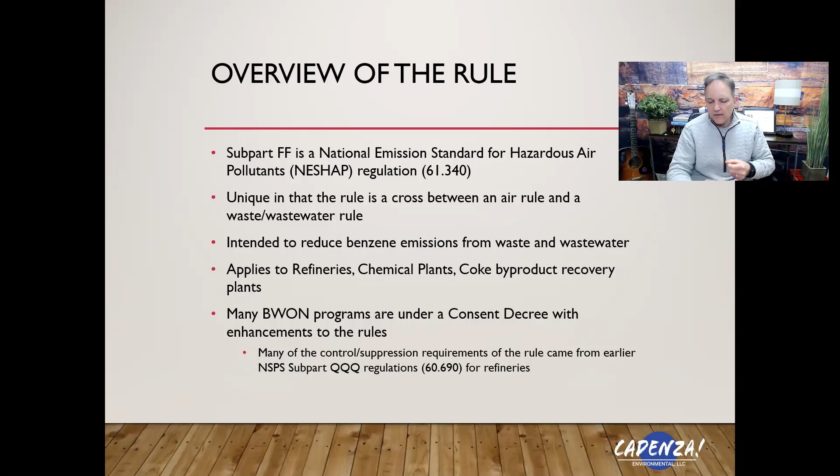So what it means, overview of the rules, the total annual benzene, that's the amount of benzene that's associated with waste at the facility. It's called the TAB, which is an acronym for total annual benzene. You must calculate that. I'll get into that in a moment.

And the other basic part of the rule is whether or not the waste and the waste streams, individual waste streams, are either controlled or uncontrolled. And those terms are not defined, but basically the terms generally refer to whether or not a waste stream is enclosed as to prevent emissions from escaping to the atmosphere.

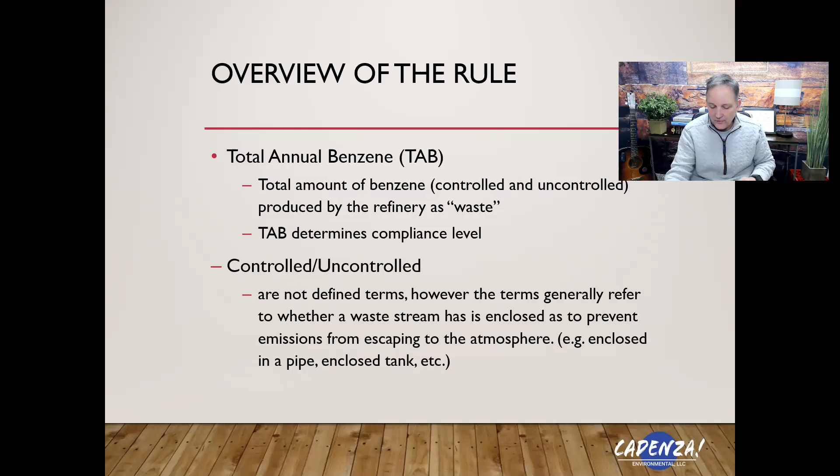So if it's in a pipe and it's enclosed and there's no way for emissions to come off of that, that would be considered controlled, or a tank or any other particular type of unit, versus an open trough or a tank with an open top, or vented to the atmosphere. Those would be examples of uncontrolled facilities.

So in general, the rule requires you to calculate what your total annual benzene is associated with the waste. And if your TAB is less than 1 megagram, that's 1,000 kilograms per year, you are essentially required to submit an initial report identifying all of these different waste streams, and then sending in a report saying, hey, we're below any action threshold here, so you don't have to really do anything else.

If you have a total annual benzene between 1 and 10, then you also have to send in this initial tab identifying the waste streams and how much benzene you have associated with all these waste streams. But then you also have to submit that on an annual basis to certify that you are still below 10. And then basically you don't have to do anything else.

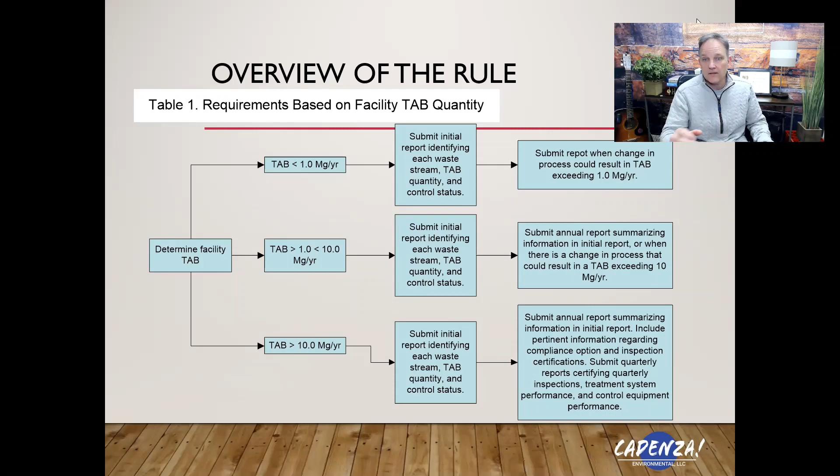But if you are above 10, which is the last category, you must submit this initial report. And many of these things were done back in 1993 when the rule was promulgated. But essentially, that is a requirement to submit this and then put controls into place to ensure that these waste streams are not allowed, in general, to emit emissions to the atmosphere. And I'll go into much more detail about how that is, and that's most of the rest of this presentation.

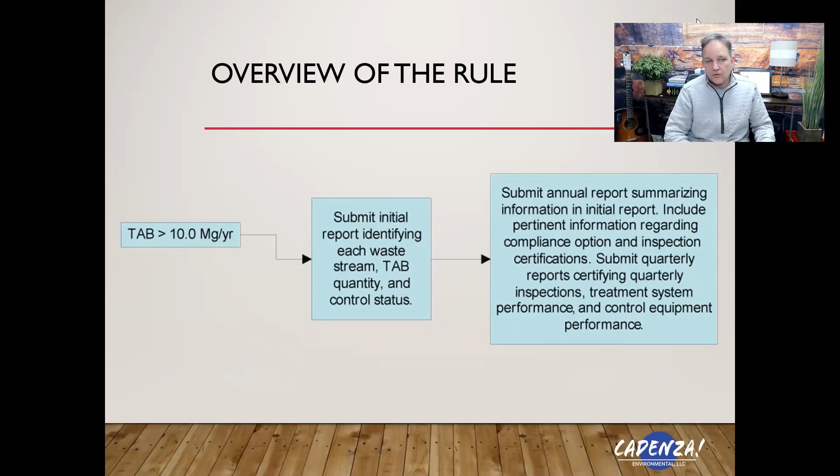So if it's a tab greater than 10, as I had mentioned here, you have to basically comply with all the control requirements, and you have to do inspections and reports and all kinds of things to comply. And not all, but most of a major good-sized refineries are required to do this. Many chemical plants are also required to comply with this part of the regulation.

If you are required to comply with 10 megagrams or larger, there are two major ways to comply. One is called the 2 megagram per year exemption. The other is treat to target, which is a 6 megagram option, sometimes known as 6BQ. I'll get into the details of the differences later in this presentation, but know there are two ways to comply.

Now I'll tell you what a waste is. It's defined in the rule, and it's different than what many of us are familiar with as the RCRA waste definition. In this case, waste is any material that is discarded or is being accumulated, stored, or physically, chemically, or biologically treated prior to being discarded, recycled, or discharged. So even if material is going to be recycled back into the facility or process, in many cases it still needs to comply with the control standards identified in the rule. Just know there's a big difference.

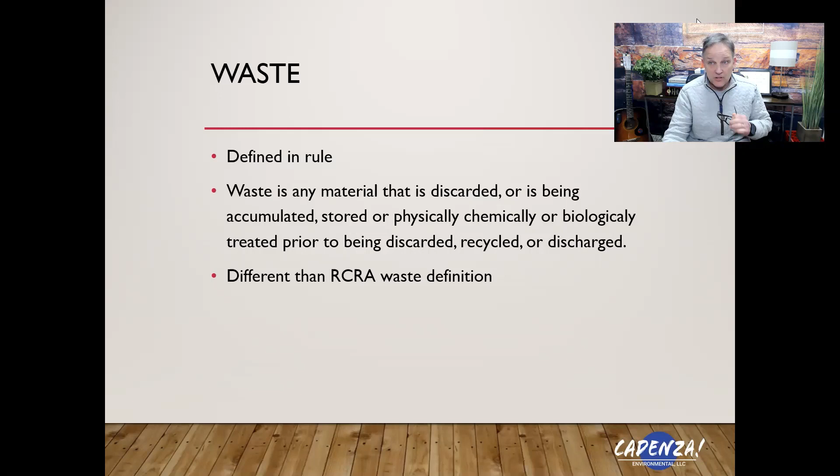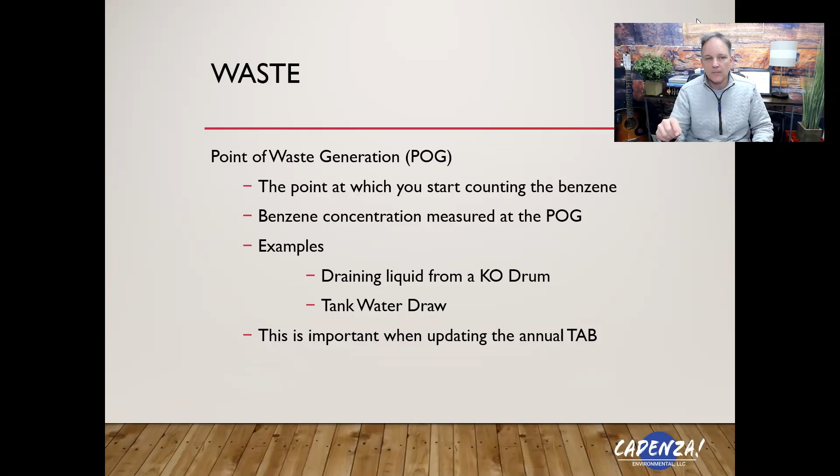The other part is the point of waste generation—identifying at your facility where the actual point is in the process where the waste is generated. It's called the point of waste generation, or POG or POWG. You may hear people talk about that, but it's exactly where it happens.

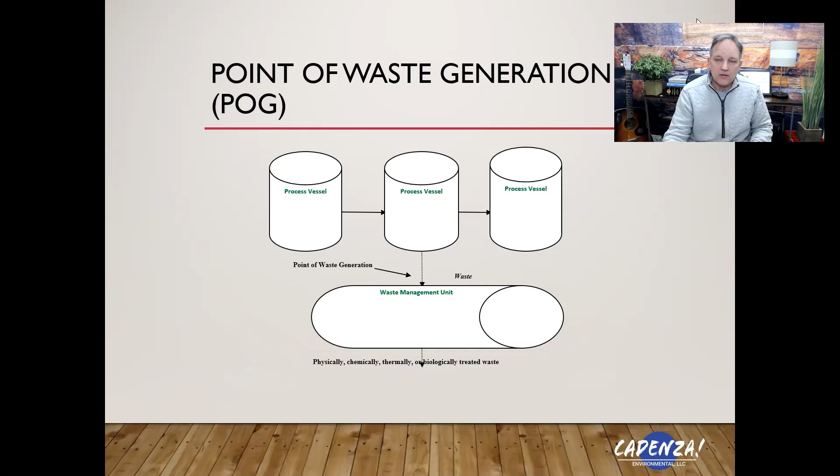For example, you may have a process vessel going to another process vessel, and in the middle of that you may have a water draw or other waste materials coming off. At that point it becomes the waste, meaning it's being treated and managed physically, chemically, or thermally in some unit prior to being completely treated, or that material going back into the process somewhere else. At that point onward, with a few exceptions I'll get into, it's required to be controlled, not allowing the emissions to go to the atmosphere.

So the difference between the TAB and the benzene quantity—I'll go back to this. The TAB is a list of all the controlled or uncontrolled waste streams, basically a list of all the different waste streams at a large facility, and that can be hundreds of places where wastes are generated. The benzene quantity is then used to track which compliance option we're using, either the 2 or the 6 megagram.

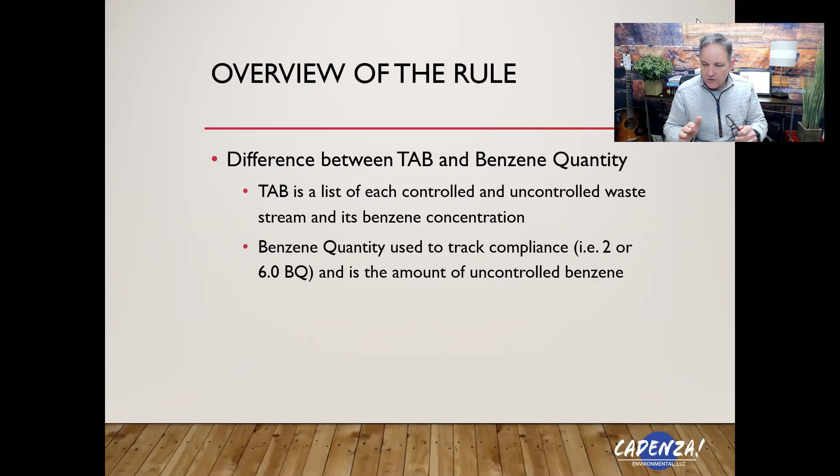I'll get into that in a moment. But I just want to make sure you understand there's a difference between the total annual benzene and what you have to track for compliance for the different options.

Under the 2 megagram option, EPA determined that if the benzene concentration in a wastewater stream is less than 10 parts per million by weight, you can exempt that from having controls to keep air emissions from going to the atmosphere. But if you have waste streams above 10 parts per million, those have to be controlled, meaning managed so they are not allowed to emit to the atmosphere—except you can have up to 2 megagrams allowed to go uncontrolled under that bucket.

So in many cases, that can be quite advantageous for lots of very low benzene concentration waste streams to be collected and managed in a non-controlled manner, as long as the ones higher in benzene concentration—above 10—are controlled, except for a quantity that would add up to 2 megagrams.

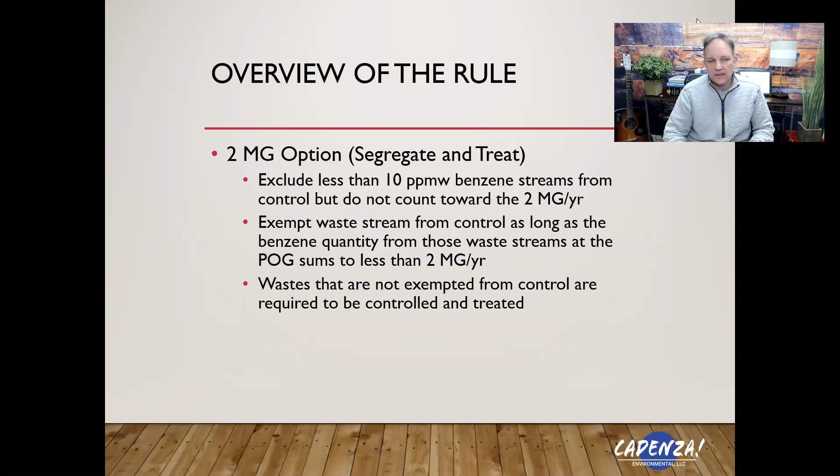However, the different option is the 6 megagram, treat to target, which means all the uncontrolled benzene waste—all of the waste streams—have to be controlled, no matter the concentration, except for up to 6 megagrams. So think of it as one column: it all needs to be controlled, except you can have up to 6 megagrams that go uncontrolled, and there are no streams—say, low in benzene concentration—that could go uncontrolled otherwise. You just have to account for everything.

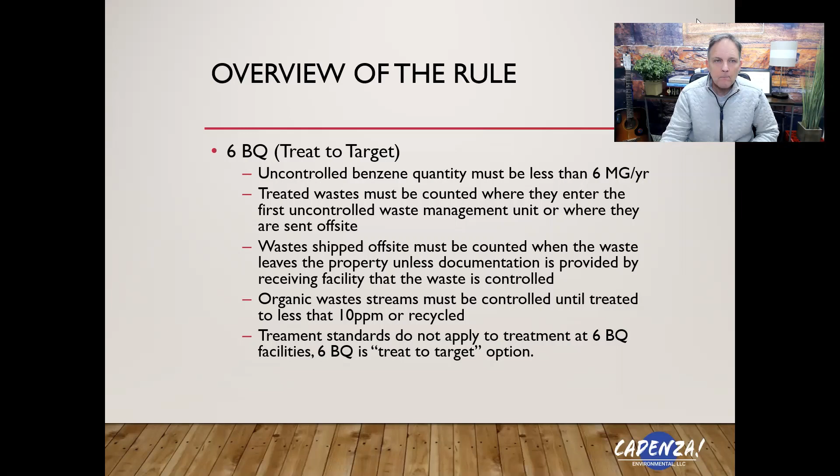So this is just another way to describe what I had just described, in terms of what has to be controlled or uncontrolled under these two differing options.

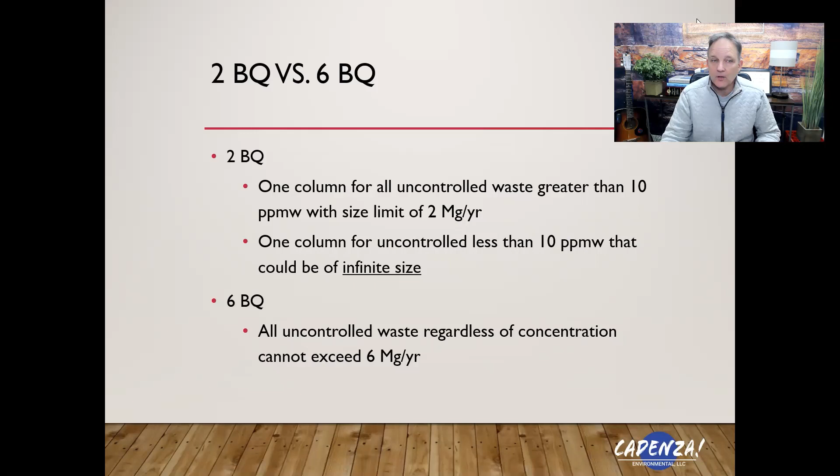So again, controlled means the waste must be managed in a controlled waste management unit from the point of waste generation to either when it's treated or recycled back to process. The control requirements for each type of waste management unit are specified in the regulations. The controls generally include seals and closed vent systems, essentially ensuring that any emissions off of the waste management units are either treated or adsorbed, but nothing is purposefully or accidentally allowed to the atmosphere.

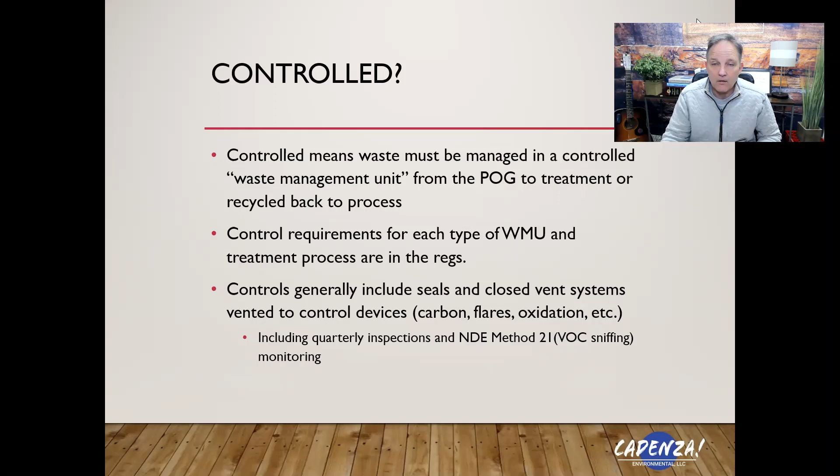This also includes periodic inspection to ensure, through what's called Method 21 - no detectable emission monitoring, otherwise known as VOC sniffing - that this is working. That's required for all of the differing waste management units managing the waste. So periodic inspections are required for all the waste management units. And here's some examples of the different types of waste management units.

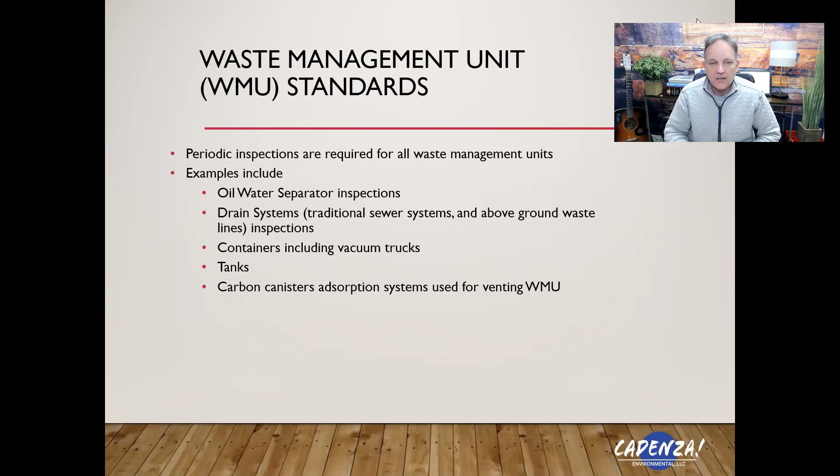There's oil water separators, drain systems - that's traditional sewer systems and or above ground waste piping - containers, including vac trucks and barrels and other kinds of things, tanks that are managing and holding waste, and even carbon adsorption systems used for venting some of the waste management units. All of these things require inspections.

So tanks, for example, that store liquid considered to be a BWON waste require fixed roof covers. They must be equipped with closed vent systems. Any emissions that come off have to either go to a flare or carbon canister or some other unit that destroys or otherwise ensures benzene is not allowed to the atmosphere. There are also alternative standards for tanks - sealing it up, floating roof tanks, other ways - that's specified in the regs, and it actually points to another reg called NSPS, and has to be managed under some other tank rules.

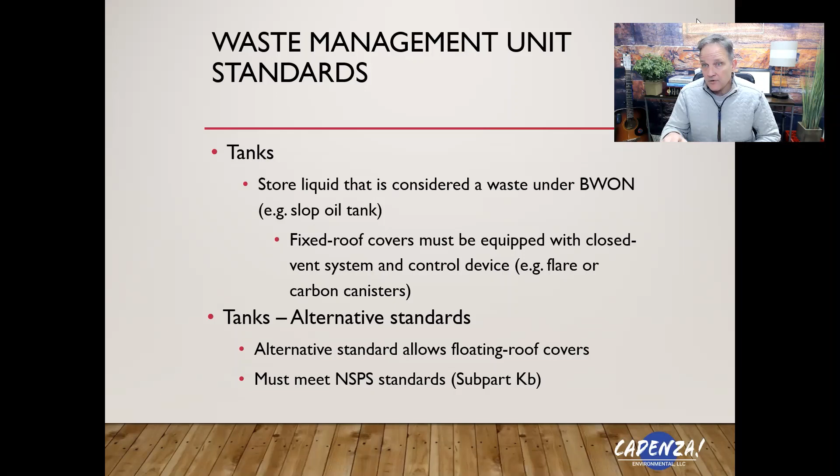Okay, so as I was saying, the vac trucks all must be equipped with covers that operate with NDE, that VOC sniffing, defined in the rules as anything that has to be less than 500 parts per million using Method 21. Openings must be maintained in a closed and sealed position. These can't be left open. They are allowed to be open for waste loading, removal, inspection, and sampling, and some things like that, but otherwise they must always be closed.

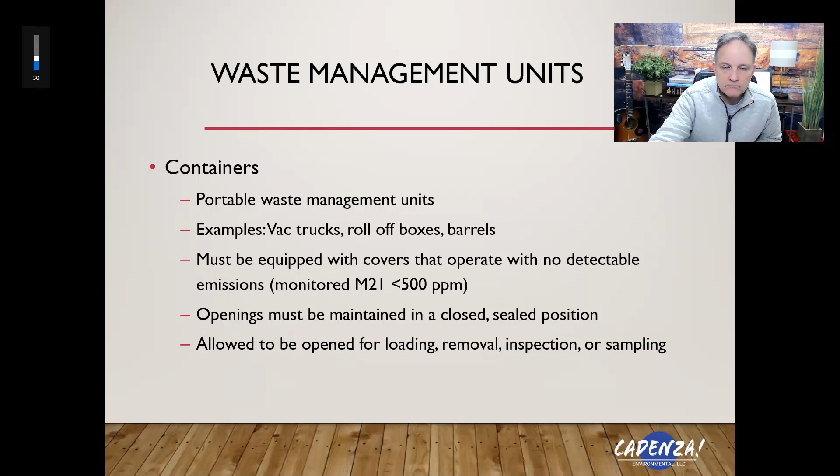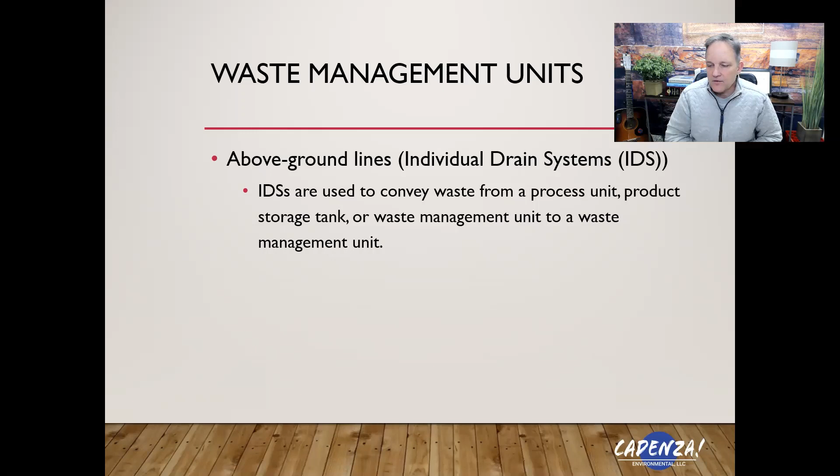So waste management units, also above ground lines, individual drain systems, as specified in the rule, are used to convey waste streams from the process unit. These also have standards that must be met. Individual drain systems include process drains, junction boxes, above ground sewer lines, ancillary equipment. They must be enclosed and vented in order to work - vented either to carbon canisters or flares or some other way to manage the emissions that would otherwise go to the atmosphere, just for a sewer system to be able to work.

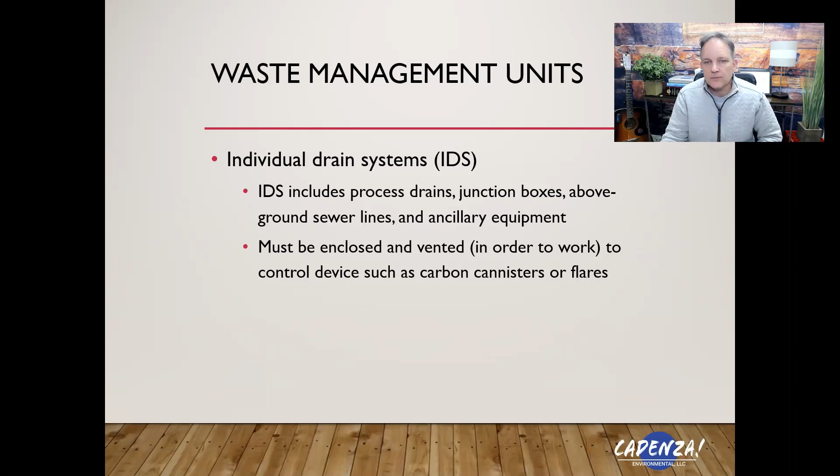Also, oil water separators are actually defined in the rule, and it's a pretty lengthy definition, but basically it includes the oil water separator and all the other ancillary equipment that is involved in the process. They must be equipped with fixed roof covers and routing all of the potential emissions into a control device.

Again, they have to be inspected and have no detectable emissions. They can also have floating roof covers. If that's the case, they have to meet the specifications that are listed in another rule called NSPS QQQ. It just has to meet certain specifications of how the floating roofs have to behave.

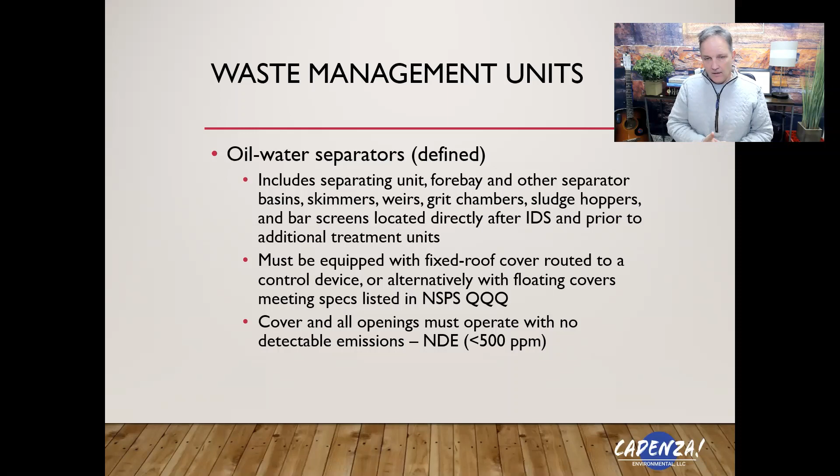Treatment processes also are defined in the rule, and they have to be designed and operated to achieve BWON treatment standards. Each waste management unit within the treatment train must have appropriate standards. So activated sludge pits, brine treatment units, strippers, all kinds of things might meet this category of how you actually do waste management for the treatment of benzene.

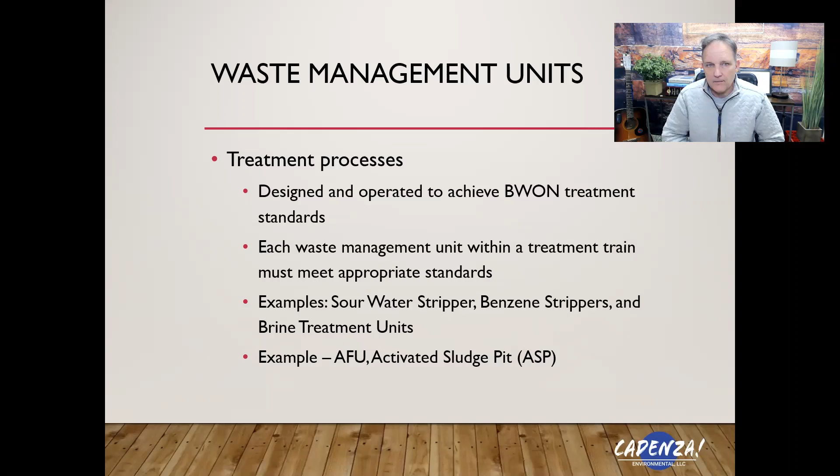So closed vent systems and control devices that are used to control the emissions from the regulated waste units. Closed vent systems, including the piping and ductwork connections, with flow inducing devices, must route their emissions to a control device. A good example of that is carbon canisters used to vent these things, to ensure that any benzene associated will be adsorbed to the carbon before any air is released to the atmosphere. And of course, even those carbon canisters have to be monitored on a periodic basis. All of that's specified in the rule as well.

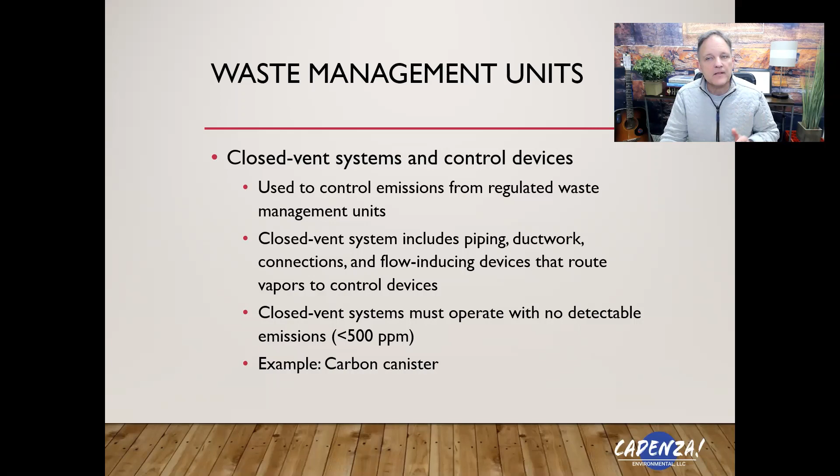One last thing too, in here called the Enhanced Biodegradation Unit, otherwise known in most rules - and I still don't understand why they called it this - but basically it's an activated sludge plant at a wastewater treatment plant. The activated sludge plant doesn't have to be controlled, because it's been demonstrated that as long as the benzene concentration, measured regularly on an average annual basis, is less than 10 ppm benzene going into an activated sludge plant, the biological material, the bugs in an activated sludge plant, will actually consume that benzene versus allowing it to escape to the atmosphere.

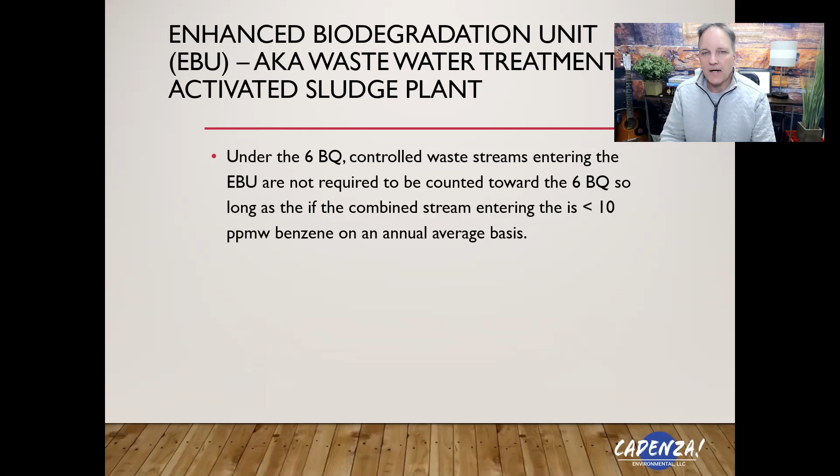It will be consumed biologically. So again, that's specified in the rule too, and you have to measure that periodically - measure the concentrations of benzene going into the activated sludge plant, or enhanced biodegradation unit as it's referred to in the BWON rule.

So you have to do all of these things to ensure that none of these materials get to the atmosphere. But as you might expect, there are record-keeping requirements in the rule. You have to keep these records for a couple of years, in some cases longer if you've signed up for a consent decree or something that might require longer maintenance of those records. The records will include performance tests, engineering calculations, inspection results, certifications - a whole lot of differing things that are required to just keep the records.

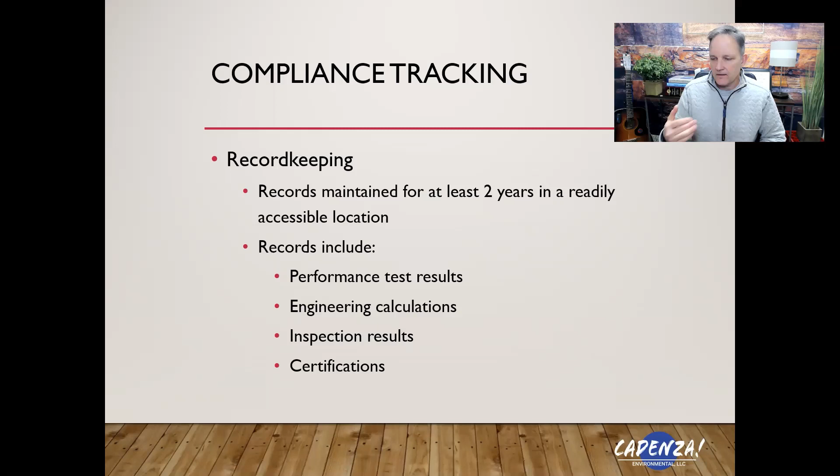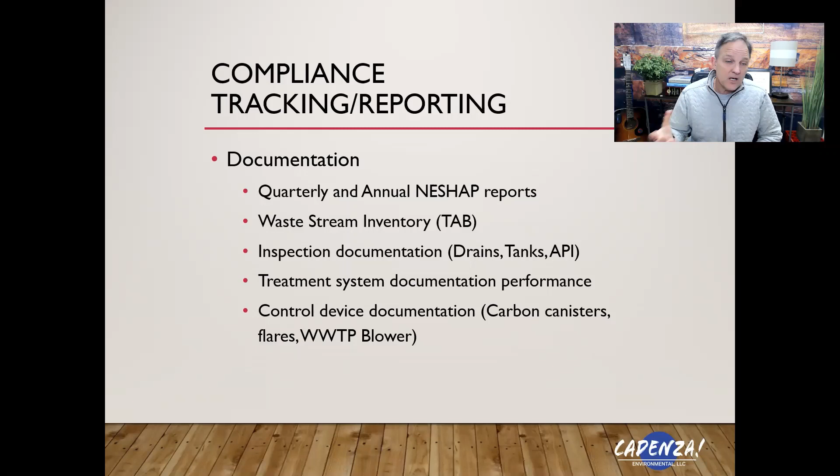Compliance tracking and reporting, as you might imagine, you also have to do quite a bit of reporting with this rule on a quarterly and annual basis. You have to identify annually the total annual benzene in all the streams - I referred to that at the beginning of this presentation. Inspection documentation of all the drains, tanks, and oil water separators - you have to keep all of that information, the inspection documentation, treatment system documentation, and control device documentation. You have to keep all of that.

And on an annual basis, you have to have a record that identifies each waste stream. Waste stream identification is made at each point of waste generation. Inspection results, calculations, measurements used to derive all of the different concentrations, and certification that the quarterly inspections were conducted, and even identify where there may have been short-term failures of equipment, and then the repairs associated with any failures.

For example, if you're inspecting something and found a place where it had a concentration above 500 parts per million, you have a specified amount of time, usually around 15 days depending on the type of waste management unit, to actually make that repair. In those cases, you have to make the repair, make sure that it's not leaking anymore, and then report that you had a failure and that you have repaired it.

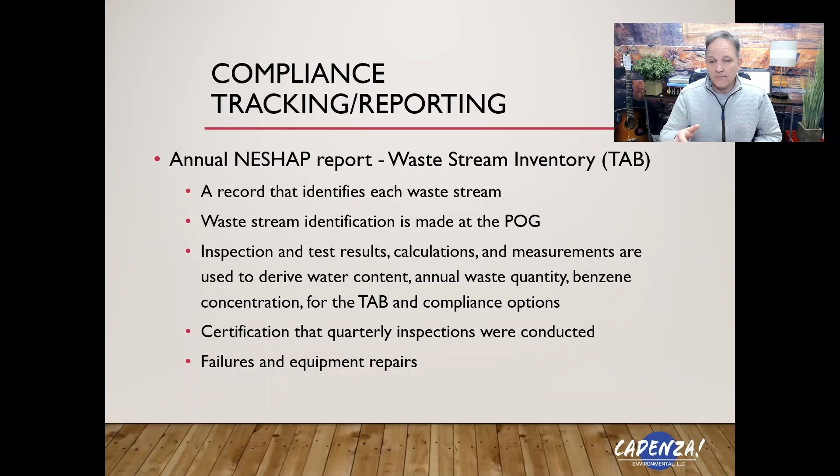So with that, that is a very, very high level summary of what Benzene Waste Operations NESHAP is all about. If you have any questions, comments, or want anything more, give me a shout.